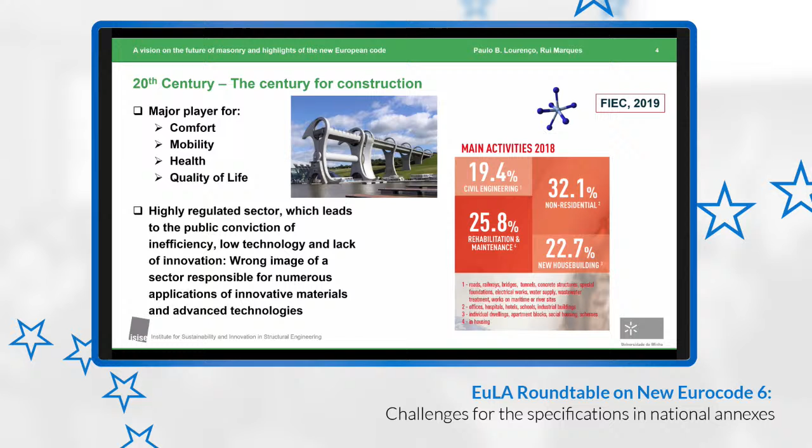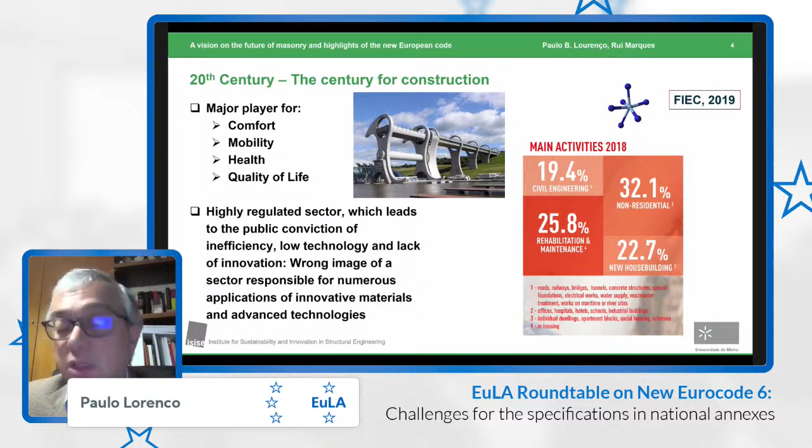But still, construction doesn't often have a very good impression from society. Society tends to think about construction as a system which is partly inefficient, very low technology, and not very prone to innovation. It is a highly regulated sector, but it is responsible for many innovations in recent decades, and in the decades to come for sure.

Now, this century is obviously a century where the world is global, where innovation plays a key role for our societies, and there are many changes in construction.

One change, as I will address further, is a shift to conservation and maintenance, because a lot of the built heritage in Europe has already been built. Another major concern, which has been here for decades, is sustainability.

This has been the buzzword for years. Now people talk about resilience a lot, and this means how a society can survive a disaster and regain an acceptable level of performance. Disasters are inevitable and we have to prepare for them, but once we have a disaster, how can we recover? This is a very recent buzzword that construction should also address.

And then there are many new words and recent words. Obviously, digital transformation or Industry 4.0 is one of them. But there are many other words around us, from cyber-physical systems, Internet of Things, big data, artificial intelligence, additive manufacturing, and of course the circular economy or decarbonization. There are many new things affecting the way we live and the way the industry will progress.

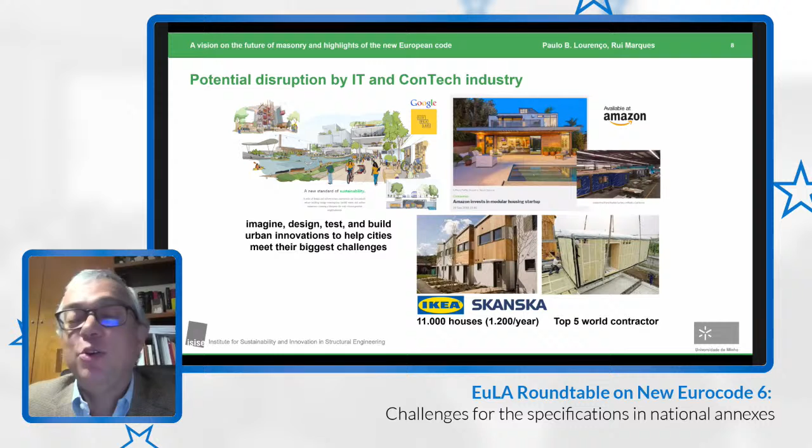It is amazing to see in the last years how the big world players are joining construction. You have Google, Amazon, IKEA. We all know IKEA for furniture, but they want to be a global player in housing, and as you can see, they want to provide sustainable, quality, and low price housing for all. At the moment their production is relatively small, around 1,200 houses per year, but this will increase.

And Amazon is investing in startups as well, and this might change part of the way we're producing houses in the future.

Now, when we look at the European market—and this is not the market in Europe, but the market that European companies work on—this is a global market divided in the world and into different categories. When you look at housing, which I'll be focusing on here today, rehabilitation and maintenance is 26% and new housing is 23%.

This means that, because rehabilitation and maintenance here is in housing, the European industry actually gets more turnover from rehabilitation and maintenance than from new housing, which seems quite evident given the European market and the fact that it has been built for a long time.

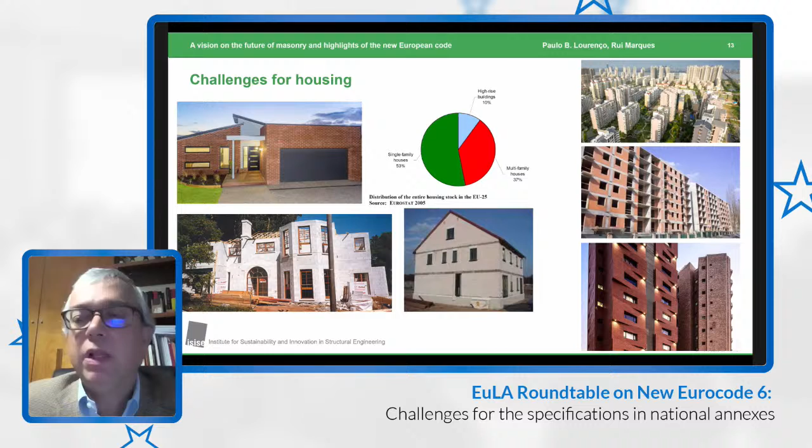And obviously masonry is very adequate for small buildings as a structural material. The buildings you see on the right, masonry is not a structural material, it's an infill material or a cladding material, which is also of course a very important part of the market. But structural masonry in high-rise buildings is not very common, with the exception of a few countries.

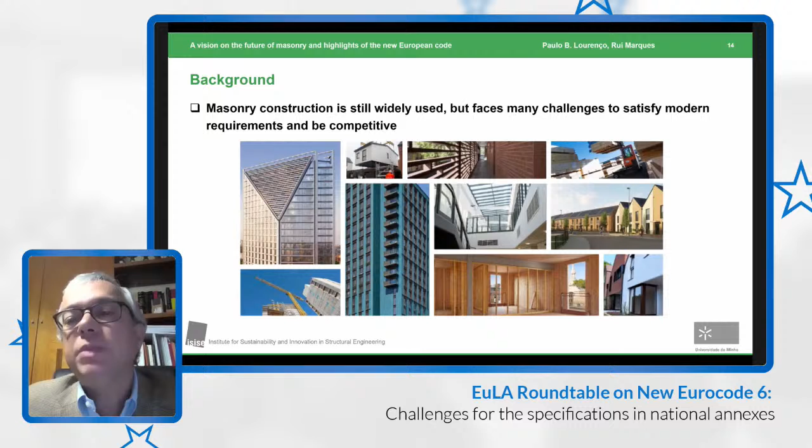And so masonry obviously remains much used, but faces many challenges with other products which are competing, and sometimes they can replace masonry.

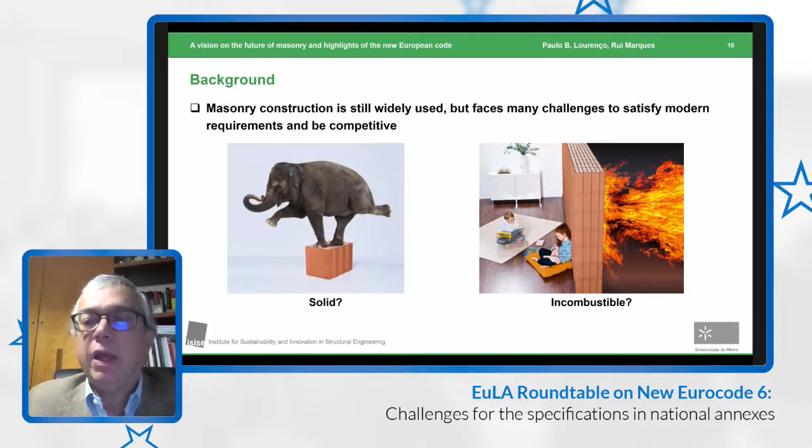When we talk about masonry and ask other people what they think about it, solidity is a word that comes up a lot—it's a solid material. It's also incombustible, so fire protection or fire resistance is quite high, which is very good. A lot of people think of it as durable; it's a material that has been around for 10,000 years. And some people also look at it as an aesthetic material.

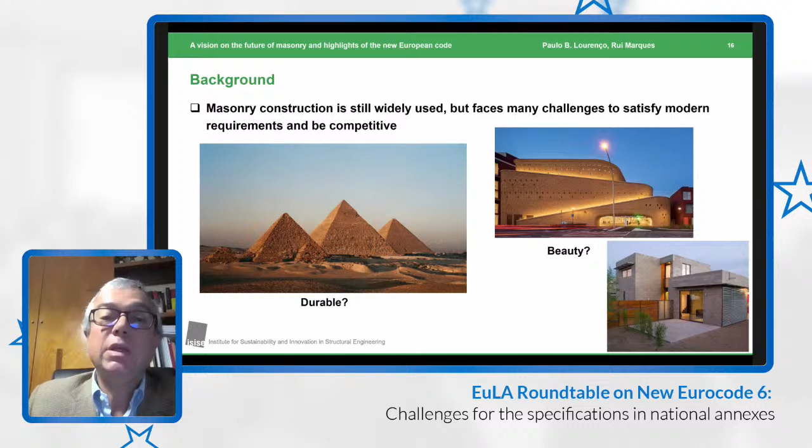Now, it's not only good things. There are also many things that people think negatively about masonry. One of them is that it's an old material and that's low tech, and people tend to think about masonry as something that has been around in a very similar way for a long time, something slow to build and very labor intensive. And labor is not only very expensive in Europe, but it's very difficult to find people to work in the construction sector.

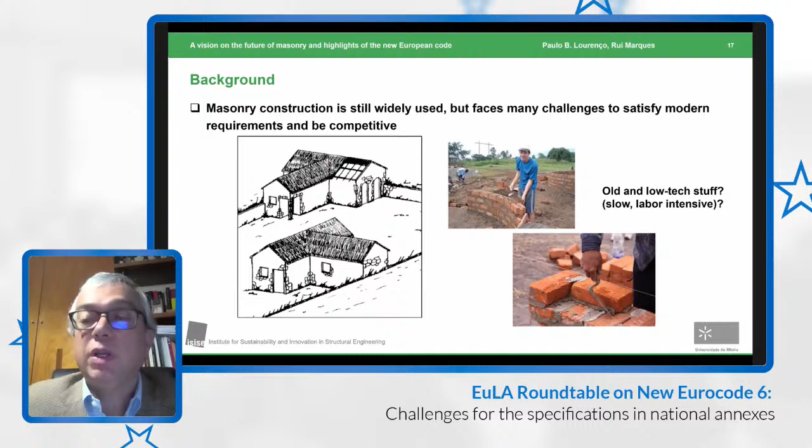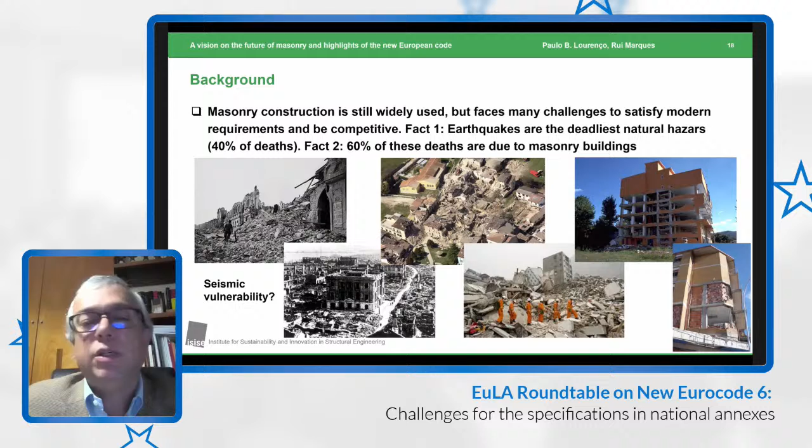Well, many people also think about masonry negatively because of earthquakes. Masonry construction is much used today, and it can be perfectly used in earthquake-prone countries. But there are two facts here which, in my view, we cannot deny. Fact one is that earthquakes are the deadliest natural disaster, responsible for 40% of deaths among natural disasters. Fact two is that 60% of these deaths, the majority, are due to masonry buildings. So it's not that we can't build masonry properly today using modern regulation, it's that much of what was built in the past is not adequate in terms of vulnerability against earthquakes.

Here, with one of my coworkers, Dr. Rui Marques, we attempted to understand if there is a link between earthquakes, or in technical terms, seismic hazard, and unreinforced masonry. There seems to be no such link. Some countries with low hazard use masonry, some countries with low hazard don't use masonry, and some countries with medium or medium-to-high hazard also use unreinforced masonry. So there's no direct link.

In my view, as a researcher and also partly as a professional, I don't see a problem building unreinforced masonry buildings that are earthquake resistant. We have enough information to do it.

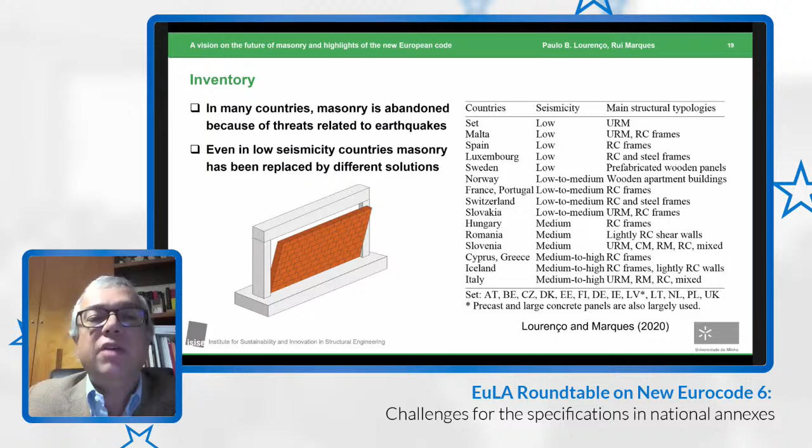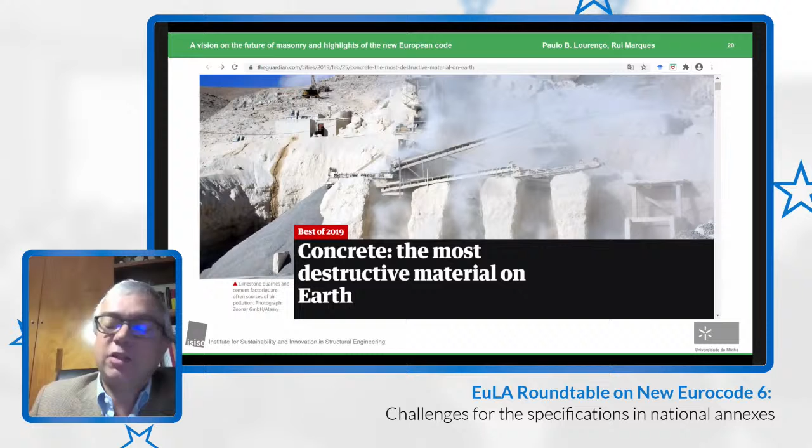Now, more bad news on the public side—I'll go fast to the good news—is that the best, or worst, of 2019 was that concrete is the most destructive material on earth. This is not very nice for the construction sector, so there's a lot of pressure from society. And it's amazing that everybody talks about construction because of the impact it has on societies.

For example, the French government would like to make all public buildings at least 50% wood. This is a major change. And in fact, the question is, do we have enough wood in the world to build in wood? It doesn't seem so, at least wood that is properly harvested.

And so you can see the European Green Deal, which makes clear that carbon has to be paid for—carbon has a price because nature cannot pay the price anymore. The question is, when you think about carbon, immediately you think about steel and cement, which are basic materials for the building industry. Can you import cement or steel from other countries where the regulations are different? The European Union will not be in favor of that, so the carbon tax will have to be paid everywhere.

This is the most recent statement, which I think is important in this context, from the President of the European Commission of the European Union. She says that we need a new European Bauhaus, which is about bringing the European Green Deal closer to people and homes. Again, the politicians are always thinking about the building sector. When you look at the new European Bauhaus, most of what they speak about is linked to construction—natural building materials, energy efficiency, demographics is also linked to construction, we need new houses, digital innovation, resource efficiency, etc.

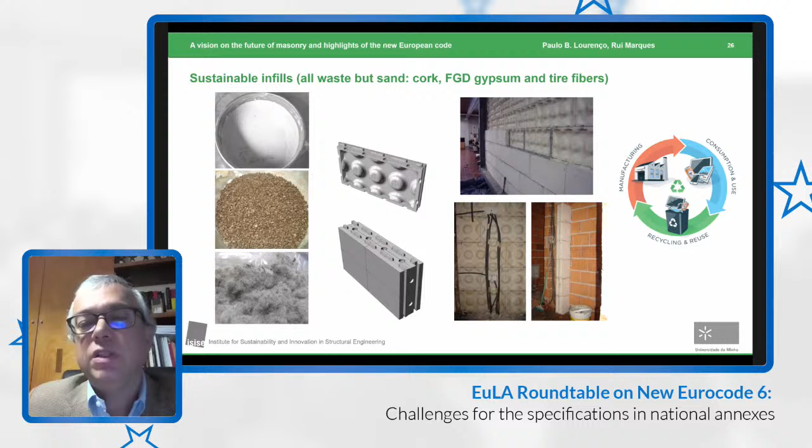Now I show you here two products which I'm proud to have worked with. One product is, I think, extremely actual, and it's a patent product that only uses waste, okay? So everything in the product except part of the aggregate is waste, to replace masonry infills, non-structural.

And the second product, which I think is a very nice global story for masonry. I mean, the question is, if the masonry market doesn't solve the problem and people do like masonry, well, they will solve it in another way. So obviously we can do just dry infills, gypsum infills, and make them look like masonry. That is very simple today. And they even say that brick slips will solve our problems.

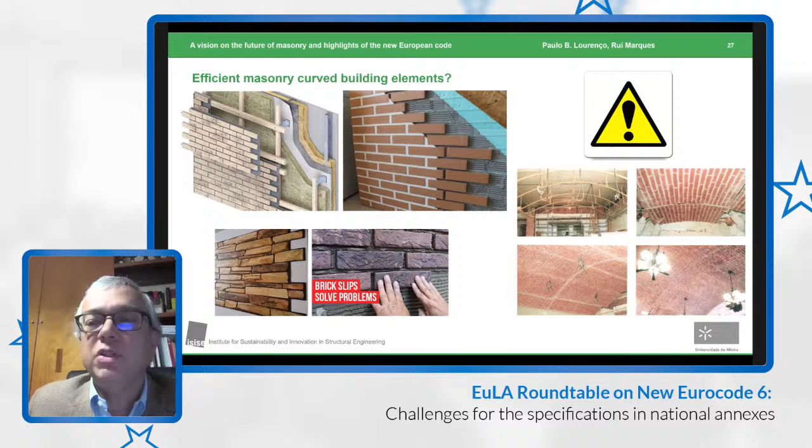Also, if people like a masonry vault, well, you can also do it in a polymer. So why do I have to do it in brick? So this is a major danger, in the sense that if the industry is not innovative enough, people will try to replace it with something which is easier, cheaper, and in some cases even more energy efficient.

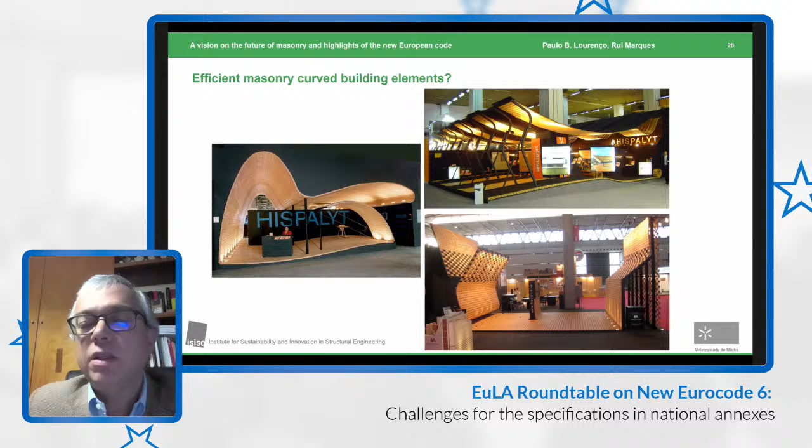Now we try to address this problem of curved elements with a product which I'm very proud of, which is the FlexiBrick, which was used three times in a row by the Spanish Association of Brick Producers. So they liked very much our product. They made these amazing booths in industry fairs, and the product was a success.

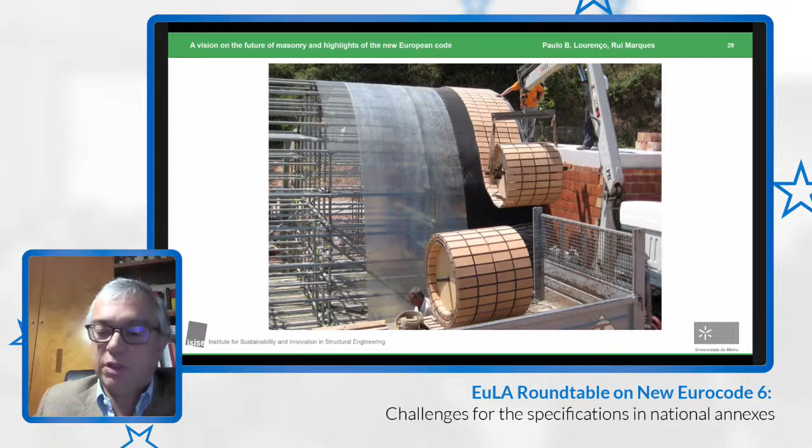Now, it was a failure for the original idea, which was to make curved elements made of masonry that you can see here on the right. And the product was a success—on the left—which is another, or a spillover effect, of our ideas. So the product failed to develop curved surfaces made of masonry, but it was successful to be used

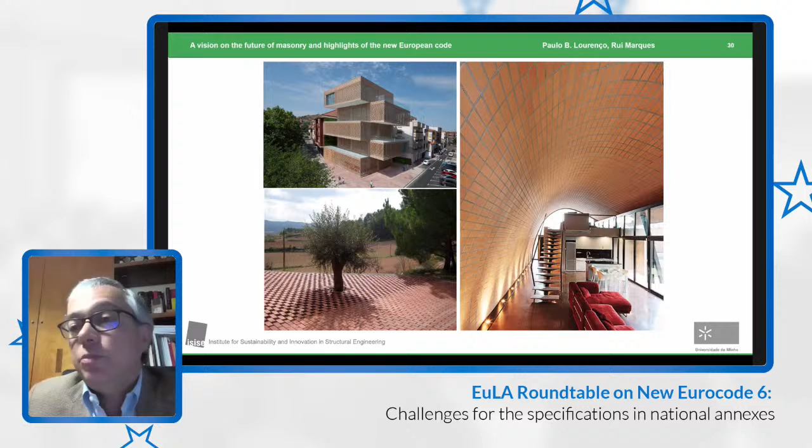for gardens or to be used as shading. And the product is successful and it's selling. So this is, I think, an example of how innovation could go in another direction.

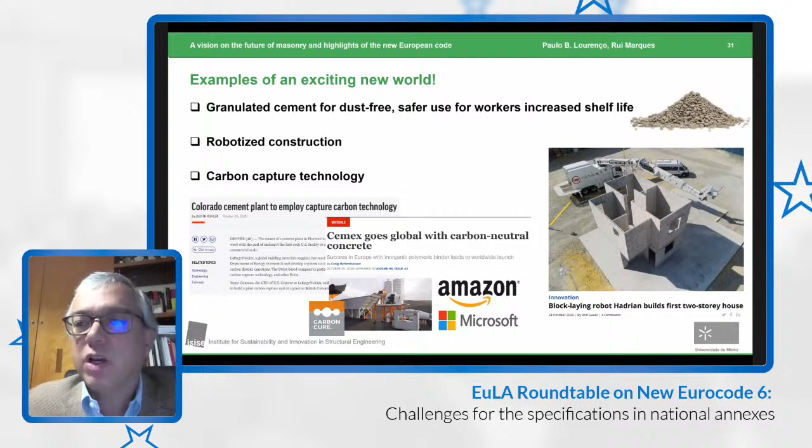So I think it's also very important to be open to this. Now there are many exciting examples of a new world—I put here some pictures. I will only say something about the one on the left, which is a company in Canada where Amazon and Microsoft put over $1 billion as venture capital. So you can see that everybody is interested in construction. We just need good ideas.

This is another idea which I think is quite important, and it's a challenge for Europe. When you think about building information modeling, I would say, for example, the Masonry Society in the US has had a building information modeling committee for a long time. And it is easier in the US where the products are more similar. In Europe and across the world, masonry is so different that it creates a lot of problems—for example, to put it in Autodesk or in Revit, and to have it easily applicable to all professionals in the world, because sometimes it's too market specific.

The same happens, for example, in dry mortars. You can see that most of the market is not obviously for masonry joints, it will be for plasters or for tiling. And then in Europe, the market is mostly dry mix, but if you go across the world, it's not certainly mostly dry mix and is still small percentages, depending where you are in the world. So there are many things to be done and many developments.

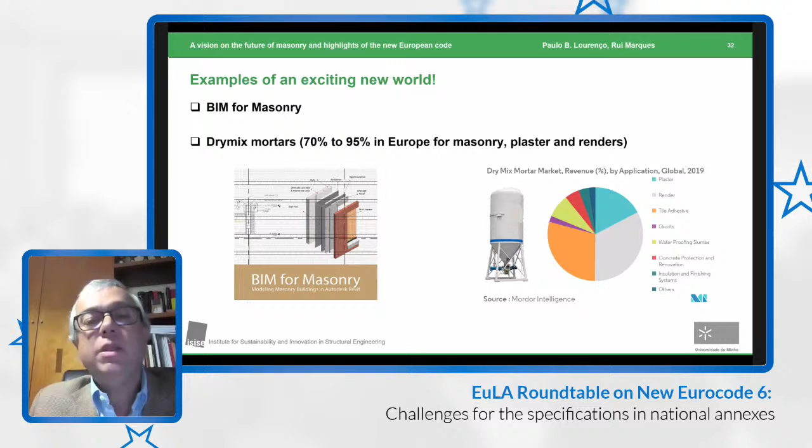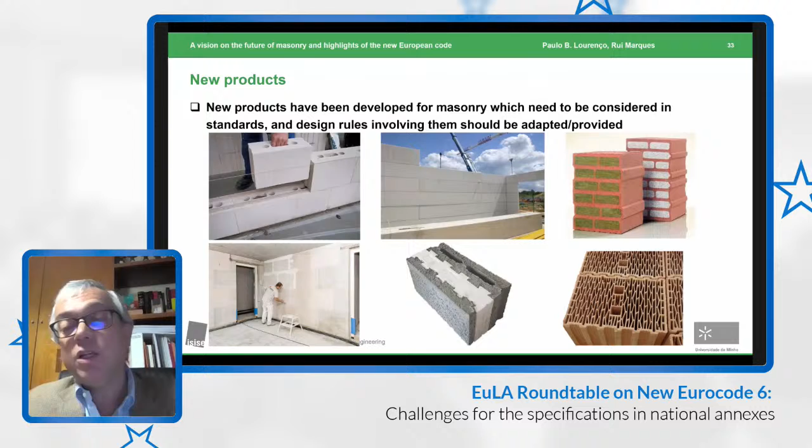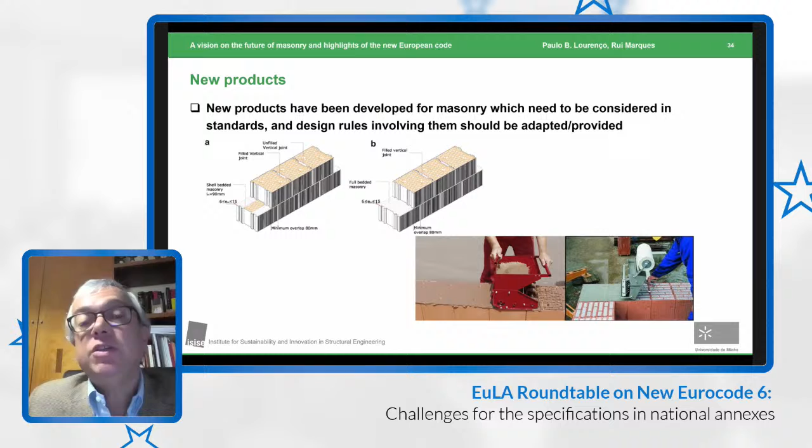There are many new products being developed, a lot of them addressing energy efficiency, large products with large resistance. Of course, we have products that we can install very fast, which also pose challenges, for example, by not filling vertical joints. We have many exciting new products in reinforced masonry that allow us to do different things. Some of these products are quite new, but they have implications in the code—implications for how we can use them.

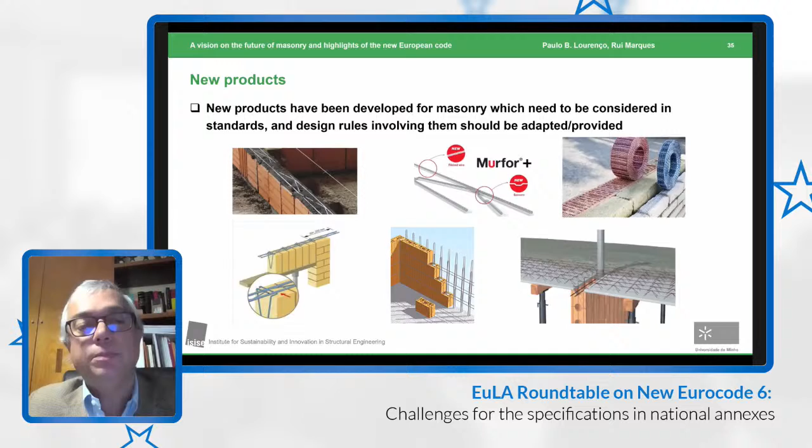And so, well, masonry construction, in my understanding, still has a large application. It has a lot of challenges to be competitive, to remain competitive with other products. And it also has a problem when you need the code to apply it—that the code may not be able to accommodate the innovation.

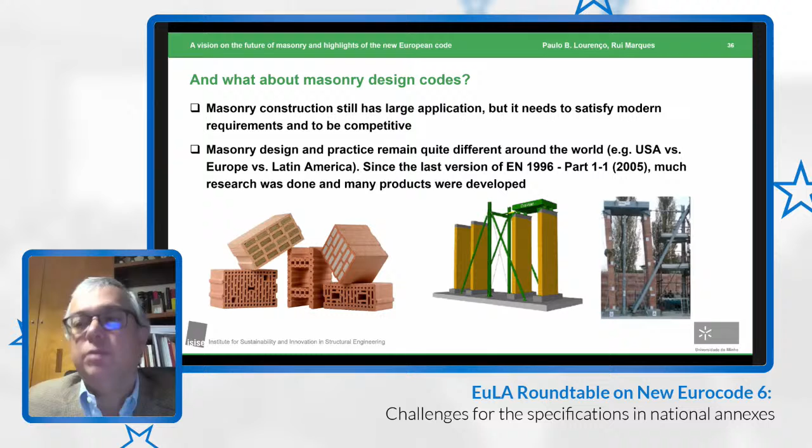Now, I'm going to speak very briefly on masonry codes.

The Eurocodes, for those that are not aware, are a set of codes that have been developed in Europe with the aim that services could be basically transferred across Europe as a common market. They had also this spillover effect, so they are adopted in many countries which are not in Europe, and there's expression of interest in many other countries as well.

So of course, for the world, it would be very nice to have common codes that would ensure that our houses, normally the largest investment of the population, and the household's most precious possession, have adequate safety and adequate performance in terms of all other requirements: durability, fire, acoustic, thermal, etc. For this, we need codes, certainly.

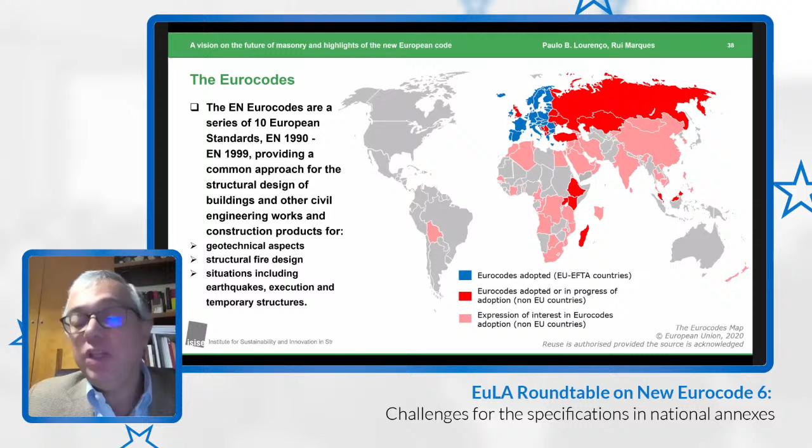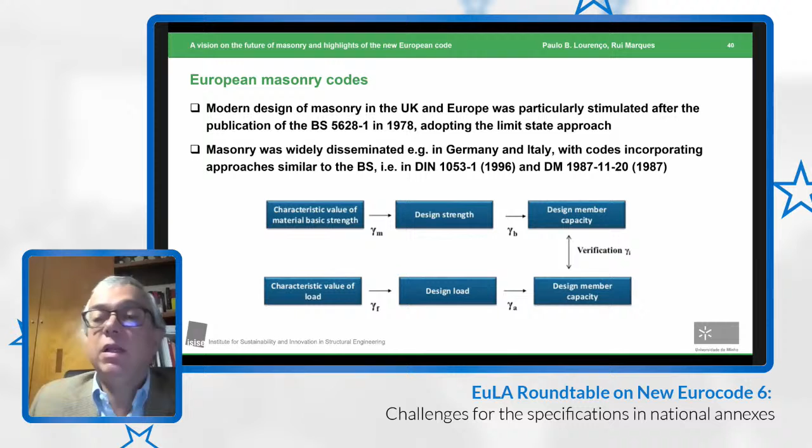And the codes are very general, so they basically address all types of materials. The European masonry codes have been developed partly based on the experience of countries like the British, the German, the Italians. They changed or developed their codes independently, and then we try to merge them together.

But there are many countries around the world, and some of them still remain different, even in Europe. So the US code is much based on reinforced masonry, so it's quite different from the codes we have in Europe. And this code is together with commentaries, which is a kind of user guide to the code.

We have, for example, many codes in Latin America, which consider an extremely large market, for example, in confined masonry, which is far less popular in Europe.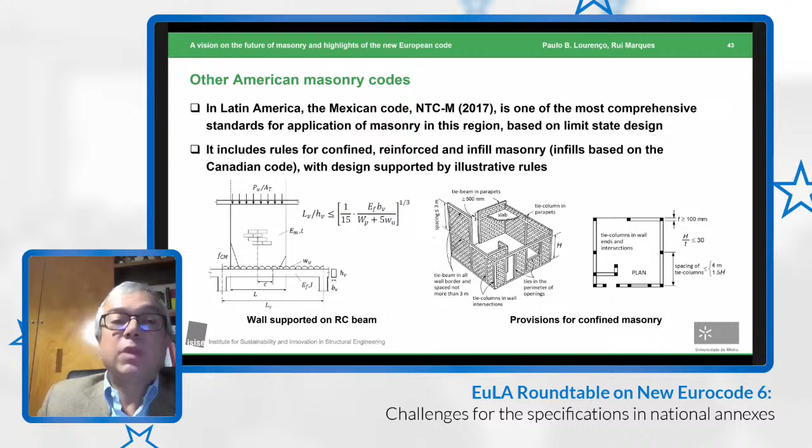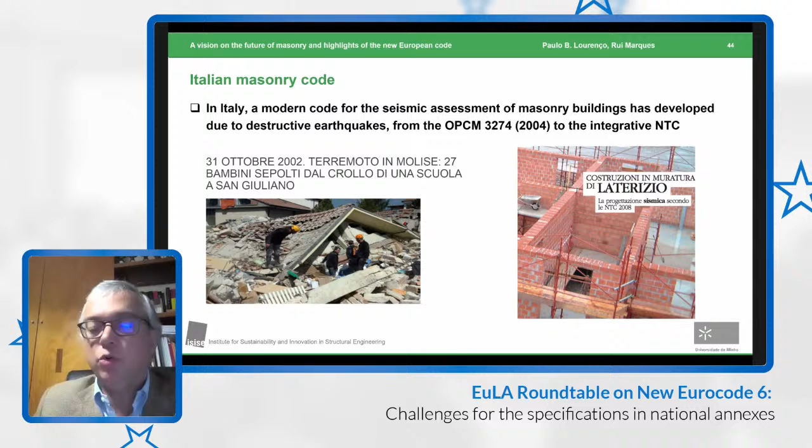And of course, another good example is the Italian code that has been developed for a long time for the case of earthquakes, because they had recurrently destructive earthquakes. The Italian code, for years, has been the most advanced code in terms of earthquake engineering of unreinforced masonry structures, which will be the base in some way for the next European code being developed.

Now, some remarks about Eurocode 6. The Eurocode 6 has basically 4 parts: one which is general rules, one which is fire, one which is execution and materials, and one which is simplified calculation methods. The last one, simplified calculation, is not used in many countries. So basically you have the general rules, the fire, and the execution parts.

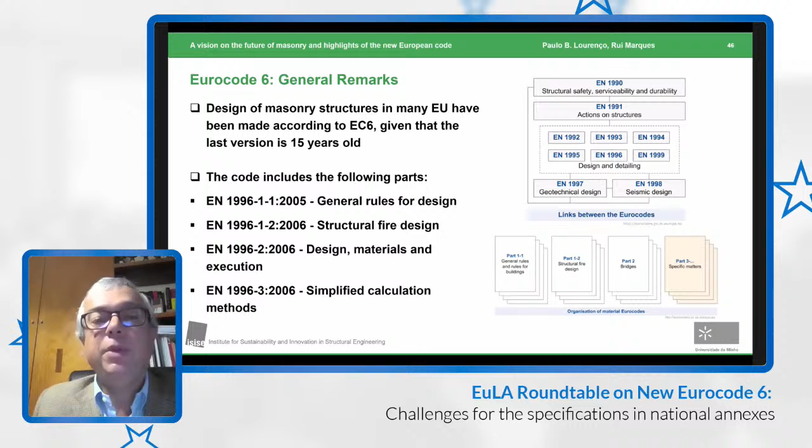I'll be talking a little bit on the general rules. The form of the code is constant across all the codes for different materials, from concrete to steel, etc. So basically you have a general section, then materials, durability, analysis, how to design for ultimate and for serviceability, and then also something on detailing and execution.

The code by itself requires training, and this is a major problem because in many countries across the world, structural masonry is very weakly taught in engineering or architecture. So many professionals have low knowledge about these materials. For example, in the UK, there is a website sponsored by the industry to help people use the code, because if you have untrained engineers and not much help, the codes are quite difficult to use by themselves. In Europe, we also have examples of books which help designers to use the codes.

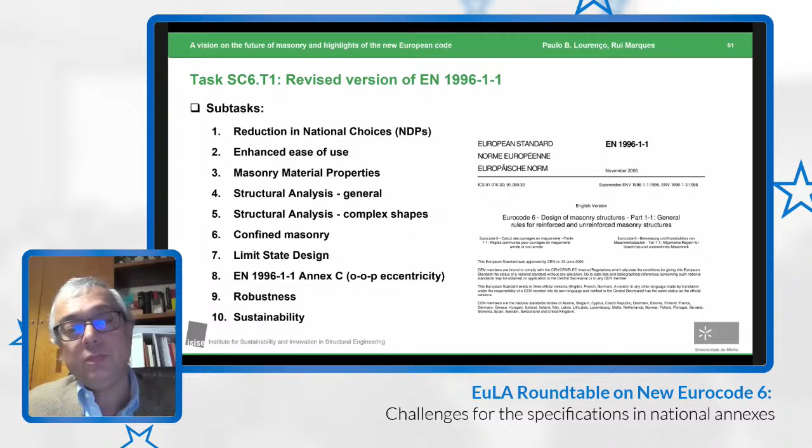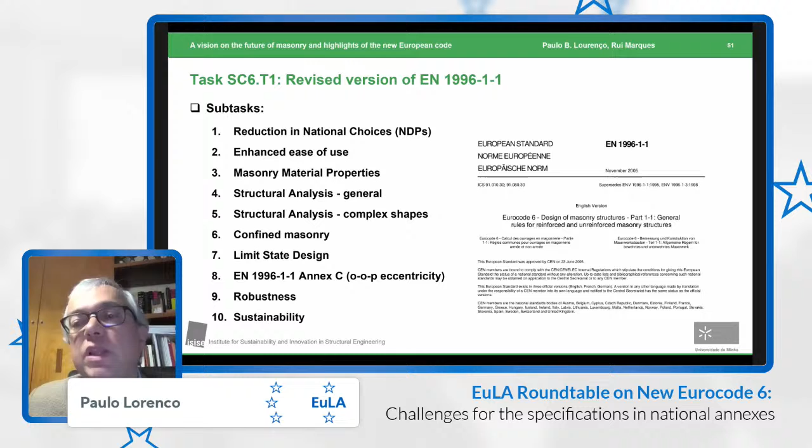There were many issues related to masonry material properties, particularly changes to accommodate innovative products. There are issues related to complex shapes, confined masonry, out-of-plane and slenderness, and issues related to sustainability, which is quite important because when you try to bring aspects like thermal performance to masonry, sometimes you end up with solutions the code was not originally conceived for.

I would like to spend a couple of minutes on what is an NDP, because I think it's important for discussion. The Eurocodes have a structure agreed by all countries, but then the different countries have the possibility to add an annex. In the annex, there are a few parameters called NDPs that the countries can decide freely. So they can replace the code in those parameters.

For example, when you think of something very easy, like defining mortar strength, the countries are totally in disagreement because they consider a lot of different mortar strengths that may be used in practice, and the mixes for that number are in the national annex. So if you have an M10, which now is gone, but indicates a mortar with 10 megapascal compressive strength, the codes have very different opinions on what mix gives this.

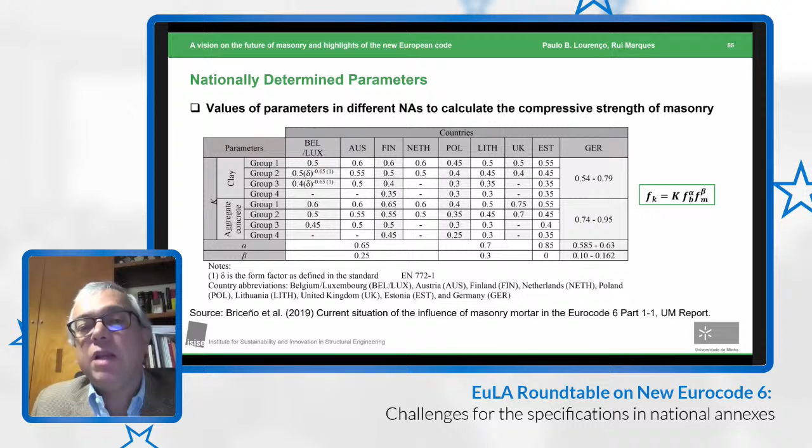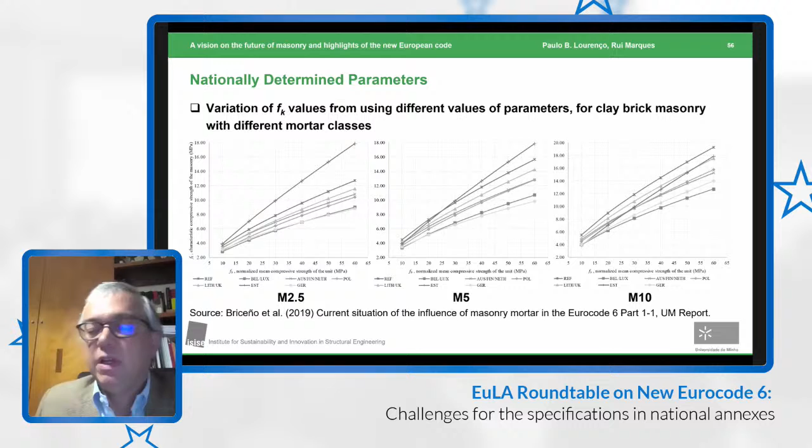There is a formula that gives you the compressive strength of the masonry as a function of the block or brick and the mortar. You can see that countries have very different ideas on the formulas to use. The worst thing is when you plot these formulas, the scatter in properties, for example for a given clay brick and different mortar classes, is too large—the scatter is from 1 to 2, basically. This is hardly acceptable, meaning the practices are still in some way not fully stabilized.

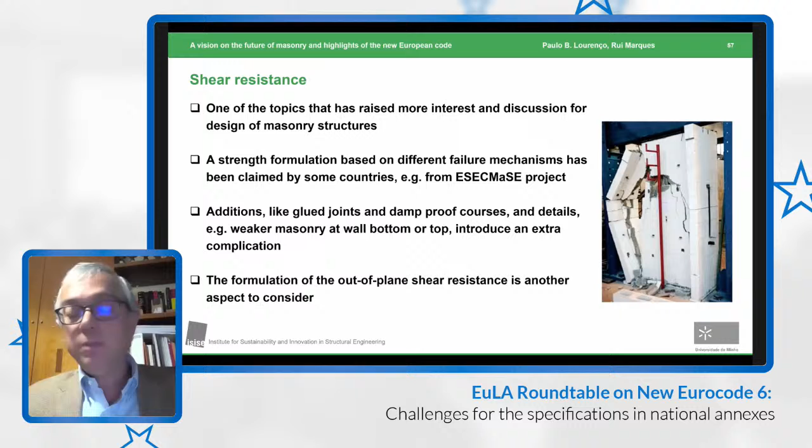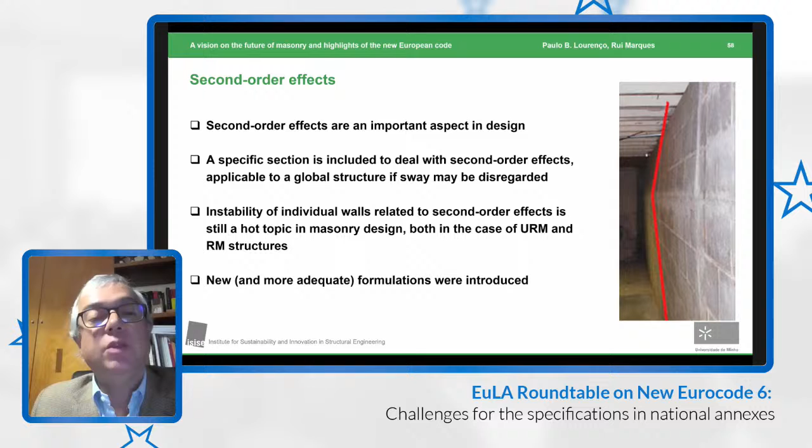Other important issues in the code include shear resistance—I will not go into detail, but I think there was a significant improvement there. There was also significant improvement in second-order effects, because the current code was not very reasonable, so this topic was addressed properly. Also, confined masonry was significantly extended, to the level used in other codes in the world, because the code was very limited in that aspect.

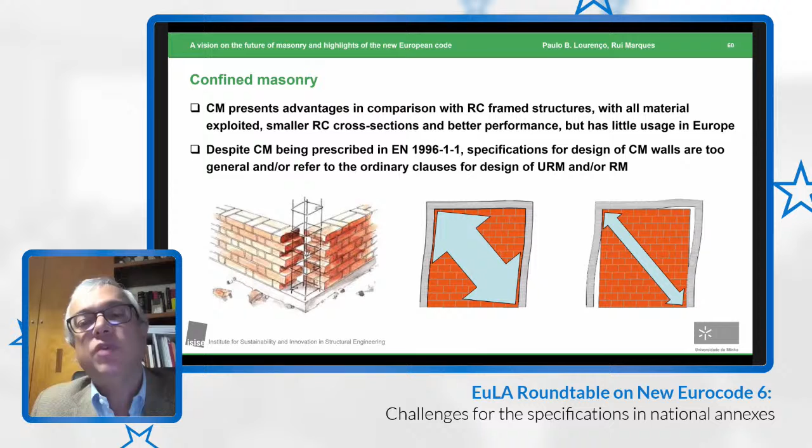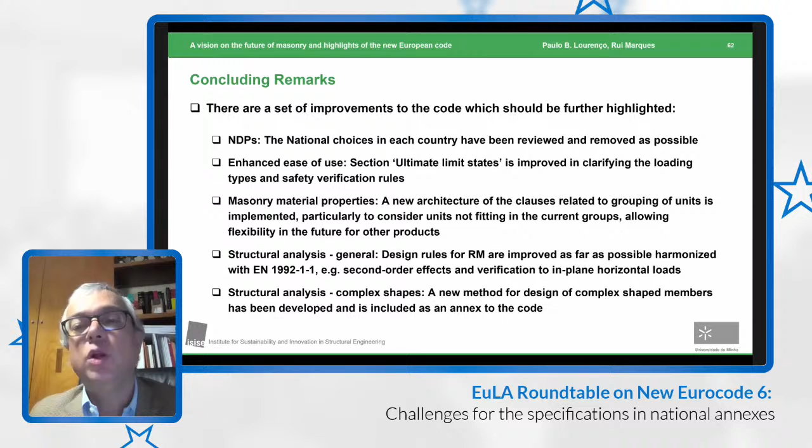I'm at the end of my time. I would like to make a couple of conclusions regarding what was done in the code, which I will not go into detail on.

There is a next step which I think might be important for discussion, because the code will hopefully be approved soon. Then the countries will have to make their translations if they wish, and they will have to define their national annexes, which will be used together with the code. Of course, each country will be free to make some changes.

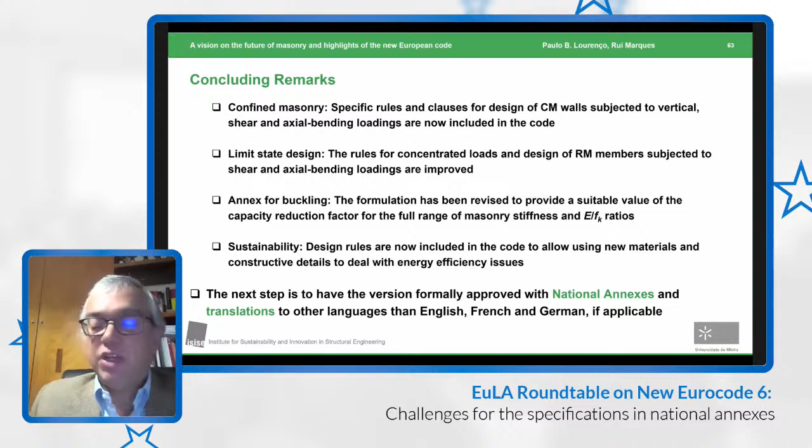The second issue I would like to raise for discussion of the panel is that I'm a strong believer in research, development, and innovation in academia, and in the link between industrial cooperation and engineering academia. I'm very happy with the present session today, and I hope we can have more in the future linking the masonry industry and masonry academics.

A second point I think is important is that modern masonry is a very important field of research, because there are many representatives of the masonry industry here today, who are responsible for many jobs and revenues for Europe. I would like to tell you that I'm relatively old, but in the masonry community, I'm relatively young.

And this is terrible for the community, and so the community needs to be strengthened. I think there is a responsibility from academia, and I'm doing my best to train future masonry researchers, but I think there should be a commitment from the industry. The industry needs to think that if they don't act, we will stop having a large number of masonry researchers in the future because many other fields are more attractive.

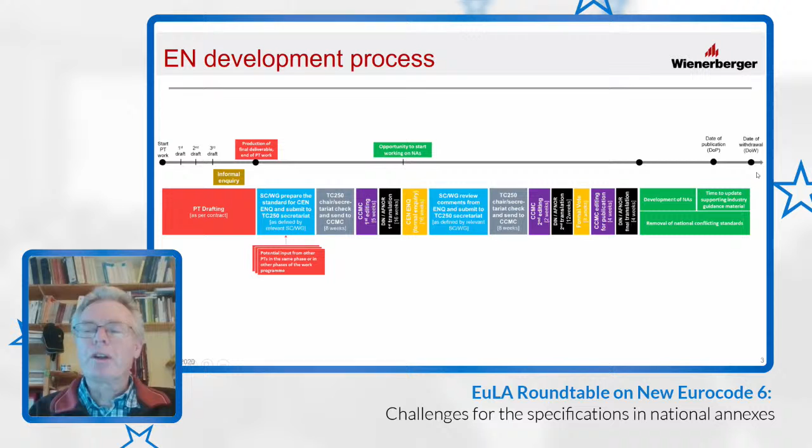But Eurocodes are - here it is a little bit bigger, you can see it. I hope you will be able to download the presentations in the end, and then you will have a good overview.

But it is a consistent package of all Eurocodes. So can we, for example, a question arises if we can work with Eurocode 6 when a new Eurocode 1 or 0 is not published yet?

Partly, I think, yes, but it will be left up to the countries how they will do it. At the moment, Eurocodes will become available. Probably the Eurocode 6 Part 1.1 will be the first one, hopefully in March 2022, maybe a little bit earlier. Then you can start working on your national annexes, and countries at the end can decide if they want to publish them right away on a national basis, or do they wait until, for example, all four Eurocode 6 parts are ready, or do they wait until all Eurocode parts are ready?

And then you have the point when those countries start to address the new Eurocodes in their legislation, that they have to be used. What is now foreseen is that at least in March 2028, the idea is that then all old Eurocodes have been withdrawn and we have to work with the new ones. So that is the time scale we have to be ready. It can be earlier, but that is more or less the limit.

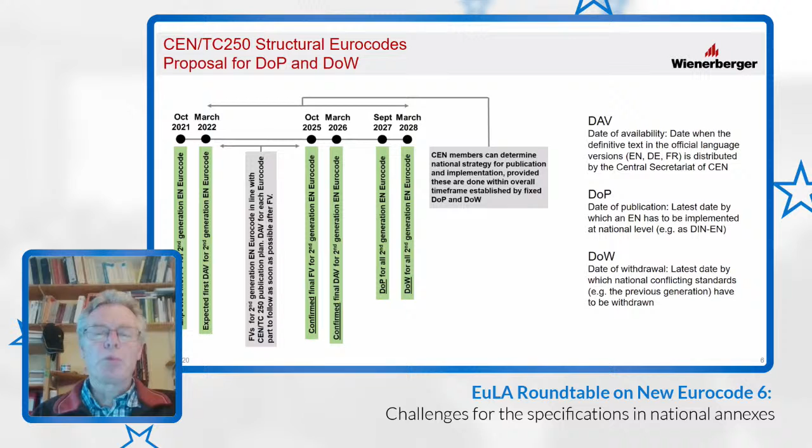And then I have one slide with some thoughts about the future of masonry. Paulo has addressed already many aspects. Of course, our big issue of the coming years is the climate neutral 2050 goal setting. And I guess the major challenge for all industries is the production process. How do we get rid of CO2?

We have to keep our current pros. We have a versatile material. There is an easy application. Paulo called it old fashioned or whatever. For most of the buildings, we can do with very simple calculations, which is also an advantage, I think.

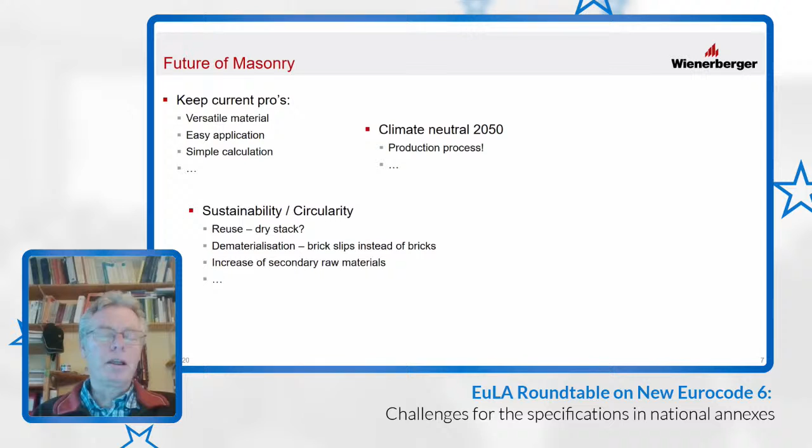We have the challenge of the sustainability, circularity, economy. Do we have to start reuse bricks? Do we have to use dry stacks for that, for easy dismantling? Sustainable use of resources, dematerialization is a topic. Brick slips instead of bricks, Paulo already mentioned it. Is that so bad? I don't know.

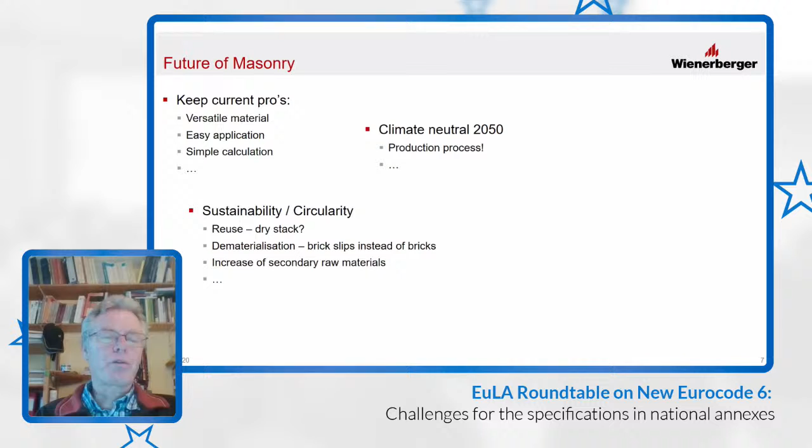If we can make the same money as an industry, I don't see the problem. Of course, we have to use much more secondary raw materials coming back from demolishing topics. Another challenge is, of course, the lack of bricklayers in the future, the cost of labor. So we must make major steps in the direction of prefabrication and robotization, I think.

Structural demands stay as they always are. And for example, what Paulo addressed about the earthquake, we have to do it really good. But I mentioned here bond strength. For strength and stability, you need coherence in a building. You need bond strength between our bricks and blocks, which is totally opposed to the idea of dry stack. So that is a conflict we have to solve.

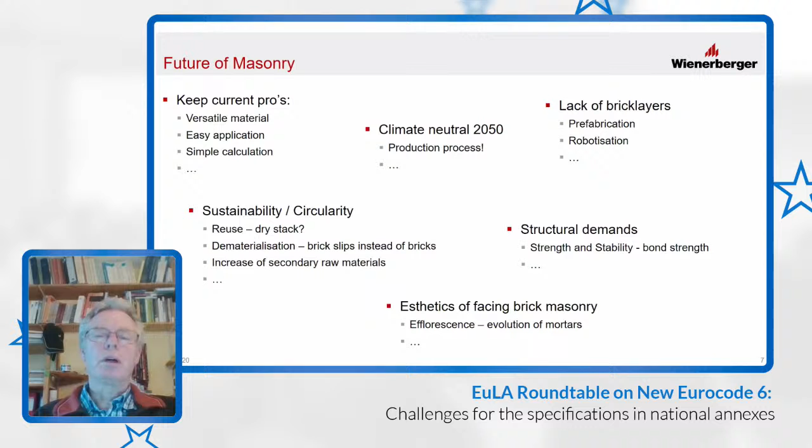Another aspect is also, if you just look at facing bricks and the aesthetics of it, over the past 20 years, we see a lot of nasty effects of efflorescence. So we need an evolution of mortars, and in that respect, the current efforts of the lime industry are really good, I think, and I hope something really good will come out of that. So those are just some thoughts. We can look at many more dimensions, but that's it for me now, and I want to give over to Antonio now. I stop sharing my screen.

Yes, well, thank you, Rob. I hope you can see me. My screen now, hopefully that works easier. So, I hope you see the full screen. Yes. Yeah.

So, as Rob already said, Paulo already addressed a lot of the topics, and you, Rob, yourself also addressed a wide range of the topics that we also see marking our future, or marking our daily life, and the involvement and research that will be needed in the future. Knowing that would kind of happen, we know each other, and so I was assuming that you would also raise the same topics as I would. I focused just on two of the many that have been mentioned before.

There is one, on the one hand, of course, sustainability, environment, and climate. If you want to put it in one package, here indeed, this is what is going to mark the day. This is what is the daily business at the moment. Seeing how we can respond to the challenges ahead of us, 2030, 2050, of course, and looking at what role the Eurocode could play therein. I think, and you said it also, Rob, one of the important things is to have the full potential at our hands. So to really exploit the full load-bearing potential of masonry.

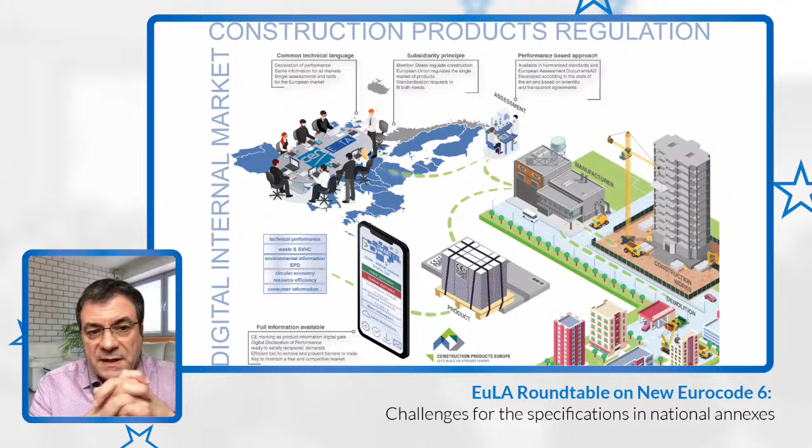We know it from the past, we've had experiences. I know from my German background, in the process of introducing energy performance requirements in Germany, we had the experience that for funding, the design compliance was the valid level. So if the designer could prove the building would have a certain energy performance, the funds would be allocated, public funding granted. And then we saw in reality, yes, that has been calculated, but this has been executed, and execution and calculation did not match.

In the environmental or sustainability battle, I think we all agree a holistic approach is needed. And then naturally, if we go holistic, someone has to ensure that the products the designer used or foresaw are really the ones installed. To close this loop, designers, design codes, and product manufacturers need to speak the same digital language. With that, I close and pass on to my dear colleague Hans-Joachim.

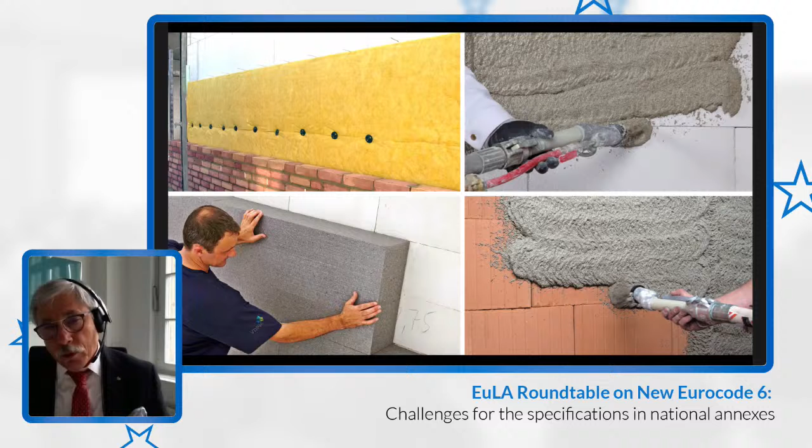And we are quite happy with Eurocode 6, because Eurocode 6 is also open for all kinds of technologies, for all kinds of masonry, starting with brickwork, with between-laying thermal insulation, or masonry with external thermal insulation, or masonry where the thermal insulation is included in the bricks and you need only a lightweight render to cover it in the end.

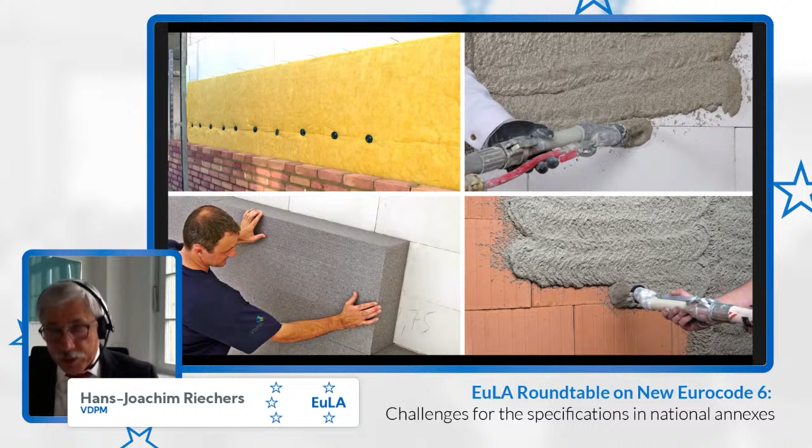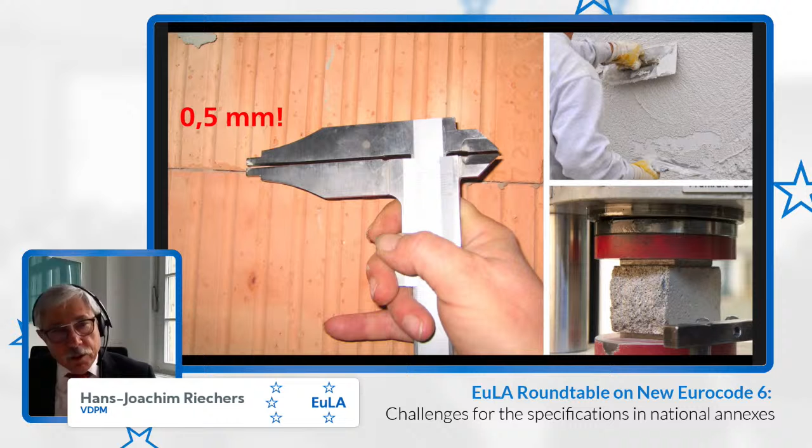The only thing we strongly disagree with in Eurocode 6 is the mortar joint of 0.5 millimeter. That's in our view much too little. A correct mortar joint should always be more than 1 millimeter. We are talking about cementitious or lime-bound mortars, and they need a minimum thickness to develop their characteristics.

And that's the reason why in Germany we will have an individual regulation saying that 0.5 millimeters is allowed, but only in a very limited number of points in the masonry, not everywhere. So we will define that the fresh mortar layer thickness must always be more than 1 millimeter, better 2 or 3 millimeter. And when in the end, in the finished hardened masonry, there are some individual points less than 1 millimeter, that may happen, that's okay, but not regularly starting with 0.5 millimeter and ending up with no mortar between the bricks. That will not work.

And there we have need for more discussions about this joint thickness, but that's the only point in Eurocode 6 we strongly disagree. In all the other points, I think we agree. That's it. Thank you very much.

And I think now it's Cliff Fudge. Thank you. Thank you, Hans. Let's just put this on.

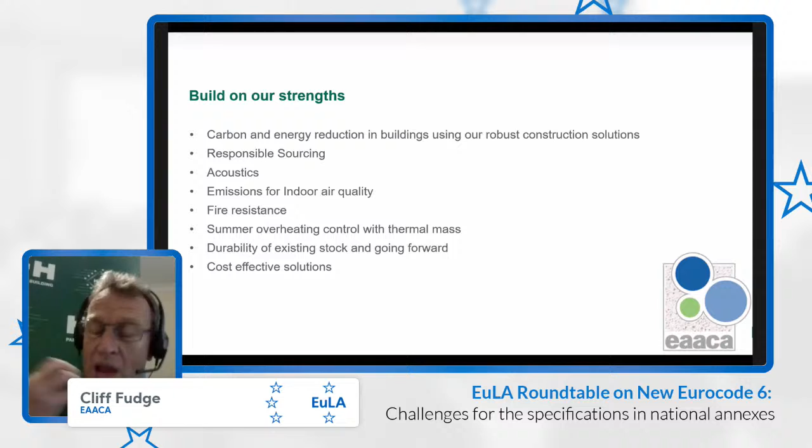So what do we need to do? We need to build on our strengths. What we have are fantastic, robust, resilient construction solutions which reduce energy use in buildings. One that we don't often talk about, but responsible sourcing - our products are sourced locally. We don't use slave labor. We don't transport products from China, etc.

But we have other things that are sometimes missed in sustainability, and that's things like acoustics. Our solutions are the finest you can ever get. We don't put emissions into indoor air, not affecting indoor air quality, which I think is a big issue for us. Something particularly for the UK, fire resistance, massive - it's driving our regulations currently. You would obviously have seen the horrendous fire that took place in London a few years ago. That's driving the way that we use insulation in buildings going forward.

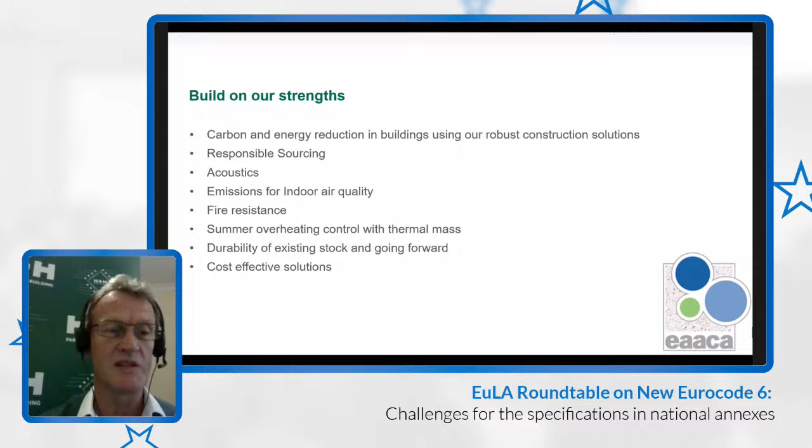Summer overheating, believe it or not, even in the UK we do get sunshine in summer. This year we've seen temperatures of 35 degrees, which has trapped some houses. With the lockdown we've all had this year, people have been inside their houses, in flats and apartments - it's almost unbearable. We've got solutions for that. The durability of existing stock, and going forward with renovation - we've seen some of the renovation stuff that's gone on just now. But overall, of course, we do have highly cost-effective solutions.

So the opportunities for us, and I think we can probably discuss this in what's left of the panel session coming up, include reducing our embodied carbon, certainly through innovation and technology in our own processes in factories, as was mentioned earlier.

The investment in green energy sources for our plants, sourcing low carbon energy, something that I think we've all got to do. On the innovation side, we can improve site productivity, digitalization, robotics has been mentioned, a lot of good things going on in our industry.

We don't necessarily shout about this, but there is so much that's there: reduction of waste in our products, including recycling at end of life. But one of the benefits we do have is that our products are made to last. It's estimated in the UK that the average house built today is going to be there in 150 years' time. We've got the products to do that. Many of our competitive materials simply won't be there. In a single solid wall product, we can meet all the demands of strength, fire, acoustics, etc., and we can continue to develop our skilled and competent workforce.

Something we all do, and again don't tend to shout about, is that we tend to engage with our local community on all sorts of business issues. And we do care about our local environment, and certainly the masonry, cement, and lime industries do something about it.

So I think it's not only a question of education, it's also a question of the products we are producing. And I can show you one picture, if I may. That's a new development in Germany, for example, keeping things much more simple than before. It's mortar plates, dry mortar plates—you cover the clay bricks with these plates, you have a watering can, and then you can add the next layer. So this is a new product making things easier. You have to see a combination of education and good products, simple products.

We might be critical of what we're doing in terms of masonry, but we see other forms of construction, even those built in factory, thought to be of higher quality, but in reality they're not. I've seen young guys with nail guns putting bits of wood together, it goes to site, and people think it's fantastic quality. It's awful, and I think we're building up massive problems with some of these systems being sold as high quality materials.

Okay, thank you. So now there are several questions coming from other panel members and on YouTube. I'm sorry we don't think we'll have time for all, so I'll leave one to the end. One question I thought was interesting: we see extremely fast changes on the directives and regulatory side and on validation of performance, but less in the structural part. It's a bit scary that the Eurocode takes so long to change, we're talking 20 or 30 years, whereas other directives like thermal or acoustics are much faster. So is this a problem for the industry? And the question is also linked to the new Eurocode - will it help innovation, or at least not be against it? This is what I'd like to ask the panel.